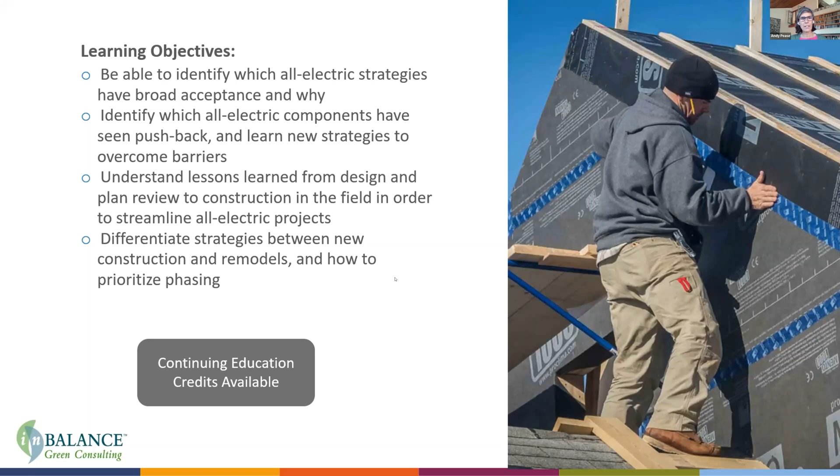which has been up and running as an all electric building for quite a few years now. So as all electric buildings come online, we're taking notes. Where have been the challenges and successes, so hopefully we can keep going forward with more and more success. The overview: why all electric in the first place, appliances starting with cooktops because that's huge, heat pumps, electricity panels, and then some resources for incentives. As Michelle noted, we're really hoping to have some Q&A. What are your experiences? What are your questions?

So jumping in with the overview, we've been having a theme of higher performance buildings. If you've been participating in this series, thank you. They build on each other to a certain extent, but we're basically trying to lift the bar in as least painless ways as we can, because we know that the higher performance buildings of today have lower energy bills. There's not the moisture problems and the indoor air quality problems that come with that. There's comfort that's more consistent, technologies are up to date, it's current, healthy, resilient, and increasingly all electric.

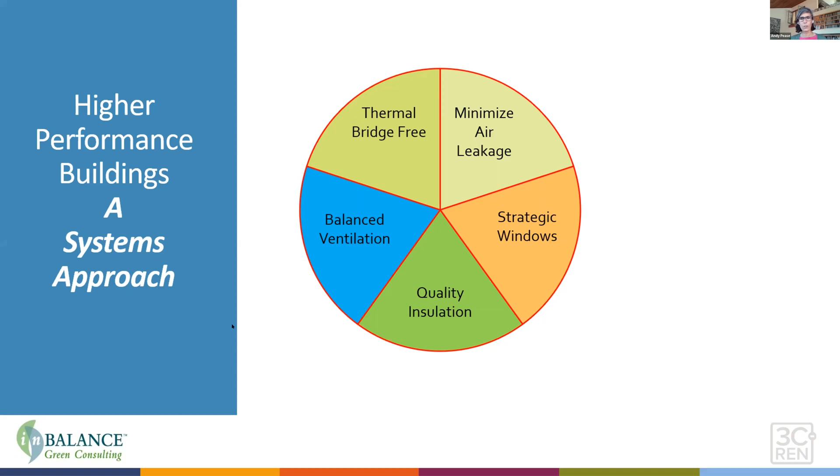Our windows are really excellent. We have good insulation and balanced ventilation, so that we have it healthy. And then we add in the all-electric component, so it's got renewable energy, so that'll be cost effective. It's safe because you're not ending up with any of the toxins from burning fossil fuels. And of course, that's helping for climate action and zero carbon.

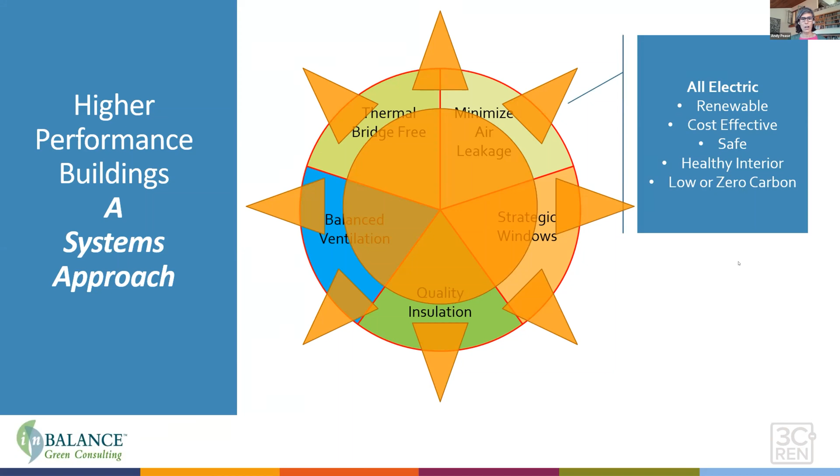But implementation, as we know, can be tricky. The general issues we've encountered are that folks often have outdated information. Builders are reluctant to jump into electric, so we might have a homeowner or an architect on board, but not the builder, or the other way around. Some combination. The costs are not always what we think they ought to be - we say it's going to be one cost and it's a different experience when we get together in making it happen. And then there's just technical nuance, like, okay, how do we actually make this happen?

Our response in general is that we do need to acknowledge there are some real challenges during this transition. So we're going to talk about sharing the fixes and the options and addressing gaps in the education, training, and supply - who's able to do this work - and keep evolving and responding as we go.

So let's talk about the specifics. We're going to jump in with appliances. The issue we really see here is consumer reluctance. We start with this because sometimes this one item ends up being the reluctance for the entire going all electric. A lot of folks have these old ideas about electric cooking - they still think of that resistance model rather than induction cooktops.

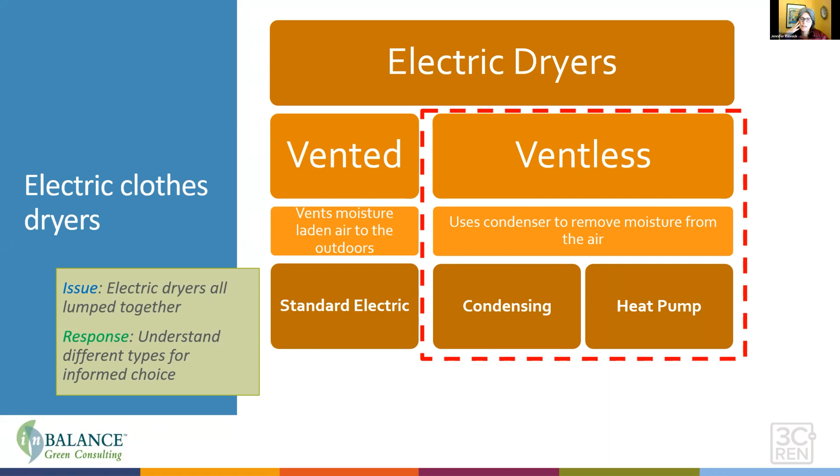But the reason we especially like the ventless style is because literally we don't have to put a big hole in the wall to vent the super hot, moist air to the outdoors. So the overall advantage for passive house energy efficiency is that there's no vent. We use the word ventless because that is how you will find it when you do your searches online. I've tried a million times - condensing, heat pump, not so much comes up - but if I just go straight to ventless, then it opens the door to both the heat pump and condensing.

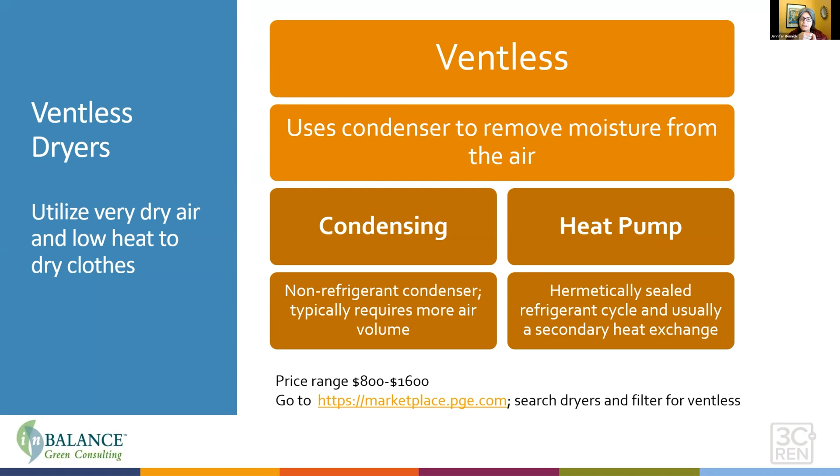Technically, both have condenser coils in them. The difference between the condensing and the heat pump dryer is that the heat pump dryer has a refrigerant cycle in it, and it's hermetically sealed, exactly like what you have in your refrigerator already. And they use that very, very cold refrigerant to condense the moisture out of the air, creating very dry air and low heat that's used to dry the clothes. The condensing dryer does the same thing, it just doesn't use refrigerant for that process.

This is how Bosch describes it. I picked this one because it's got a great diagram of their condensing dryer as opposed to their heat pump dryer. Basically, air from around your house, or wherever it's installed, is pulled in through the unit. That air circulates past the condensing coils and is combined with warm air from the drum itself. So you're drying out the warm air from the drum and the air you've pulled in from around the house. That air gets dried out, then it's reheated on low heat and put back into the drum. So it's continually moving through that cycle.

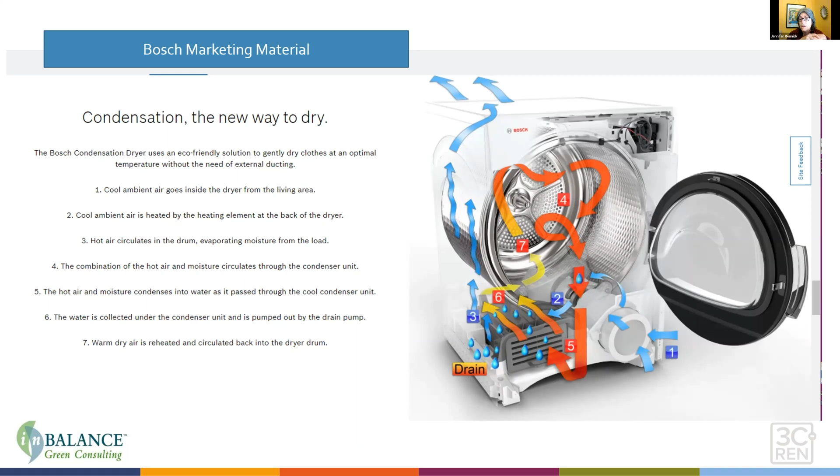So what that means is that these types of dryers have to have a place for that condensate, for that water to go. Depending on the dryer model, it'll either already have a situation where it's drained out through a hose, which is smaller than what you have for your washing machine but very similar. Some of the units, if they're stackable, will even have the hose feed into the washer that then feeds out to the drain, or the water's going to go to a reservoir. A lot of them will have a reservoir at the upper left-hand side of the unit, and you can pull it out and dump the water out. I recommend the hose.

The other thing they all have is a condenser coil. Some of the units, you have to remember to go to the bottom of your dryer unit and pull out the condensing coil and clean it off manually at least once a month to get lint and dust off of it.

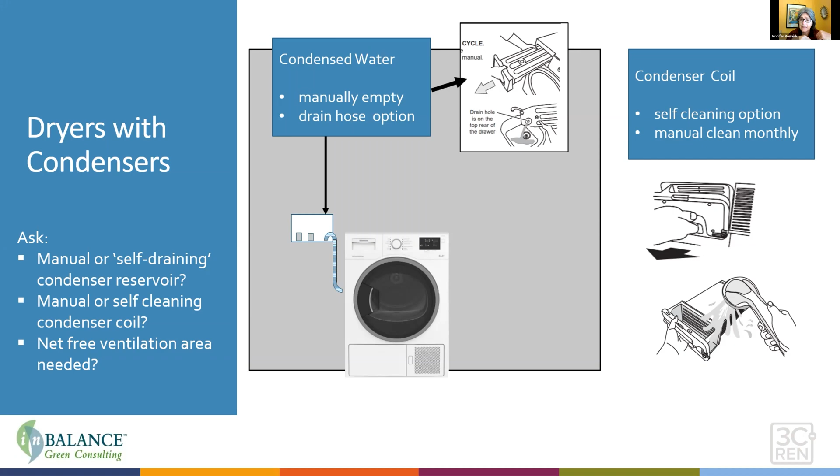And if it stays clean, it's going to work really well. Again, you might consider going with a unit that has a self-cleaning condenser coil.

Now here's a story from the field. This is my nephew's apartment. My nephew and my sister know about all this technology, they hear me talk about it all the time, so they were pretty sure. They told me, we got the heat pump dryer, and I was like, great. And their clothes weren't drying. They were really bummed. So I said, what model number do you have? Which one did you actually get?

So their apartment was designed for the one that's called, quote unquote, heat pump. It only needs a little bit of ventilation around it, just a door cut low at the top and cut low or up a bit at the bottom, and you'll get enough air. But actually the builder ended up installing the Bosch condensing version, which requires louver doors. It requires more air because it's not quite as efficient. So for a $300 upgrade, what they thought they were getting is the actual heat pump style, they ended up with the condenser type.

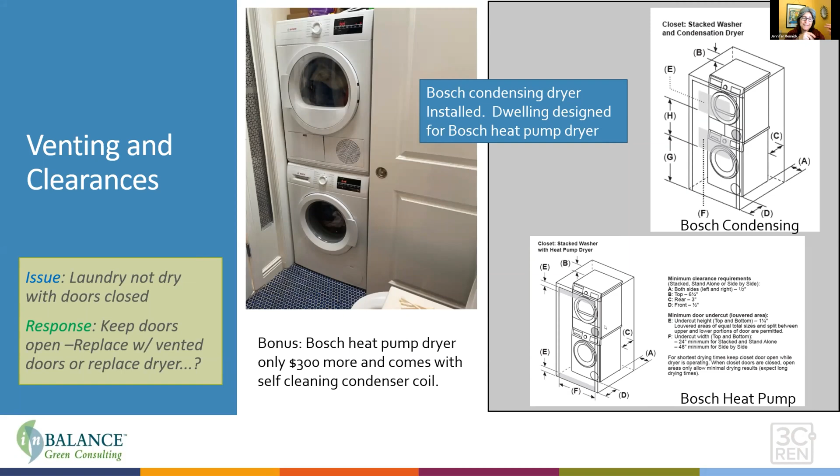Both are self-drain. So the solution in this case is to just leave the doors open. What they had planned, you could get louver doors, or they could call the installer out and say, no, we really wanted the other ones, we want them. So that's why it's good to know about those things.

So as we look at our appliances overall, we're trying to make judgments based on the overall energy use, but also the peak energy load. If we think about the efficiency of our appliances, an old refrigerator might use 1,700 kilowatt hours in a year, and a newer one might be 450 kilowatt hours in a year, which is great, unless you take the old one and put it in the garage. Don't do that if you can possibly help it.

Each of these are going to have units, and you can see a washing machine is actually a relatively low energy use. A good one is going to have a lot of spin to it, so that makes it easier to dry. The dryer can be a significant energy user. An efficient electric dryer might still be lower than an old electric dryer, but you could get down to 150 kilowatt hours per year with one of those heat pump type units.

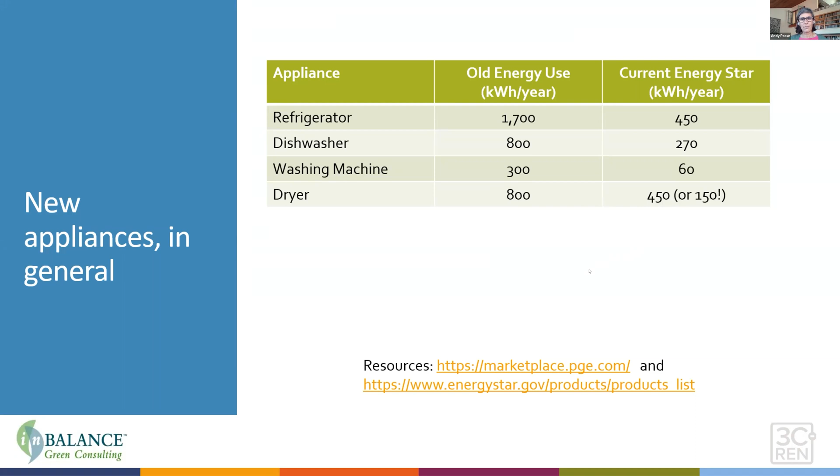And in a remodel, as we talk about new appliances using less energy, that might also ease some space on your electrical panel, and we'll talk about that more in a little bit.

Andy, all right, let's jump. Yeah, go ahead, move on.

There is a question, I think it'd be a quick answer for folks, and I was wondering too. From Tom: how does drying time of a ventless dryer compare to the drying time of a gas dryer? Any thoughts? Okay, yeah, that's a good question.

It's going to be twice as long, that's my rule of thumb that I tell people, twice as long. I'm in the process of swapping this out in my own place. My gas dryer, I could dry my clothes in like 20 minutes, but of course they're baked and the fabrics are ruined.

My sister is also a textile design person, she tells me all the time, you're ruining your clothes. So she is very happy to get the condensing dryer, low heat, saves the fabrics, but you might be in there for an hour if you're used to it being 20 to 30 minutes in your gas dryer, if you were drying on high heat. But you can't do high heat on the other units, you just can't.

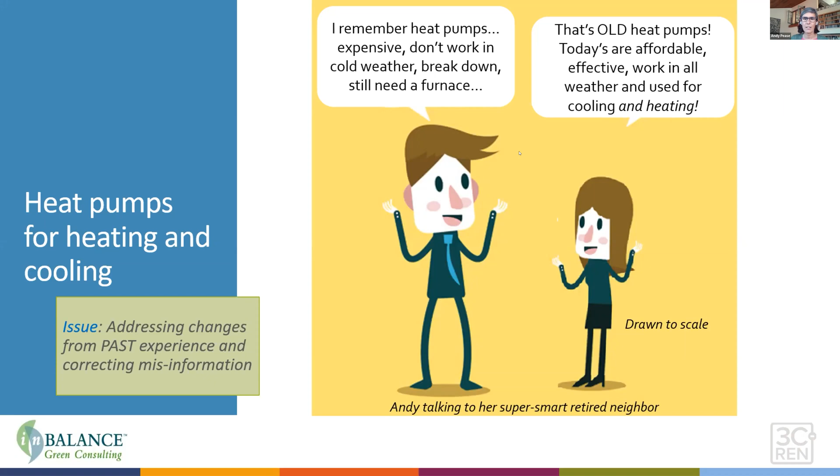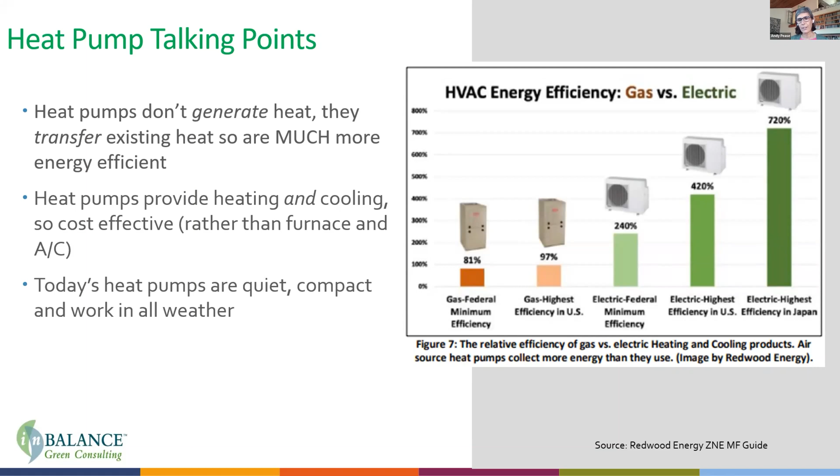Heat pumps provide heating and cooling, so they're cost effective. It's going to be more expensive than just a standalone furnace, but if you're doing air conditioning, you use the same unit to do both. In new construction, everybody's using heat pumps. And they're quiet, they're compact, they work in all weather. There used to be just one fan speed, now they're variable. So there's a lot of great things going on with heat pumps.

I won't spend a lot of time on this. We have a whole 3C Ren seminar on heat pumps and how to install them, but I just want to lay out the parts and pieces to demystify it. This is Jennifer's house, this is Jennifer's dog, Sparky.

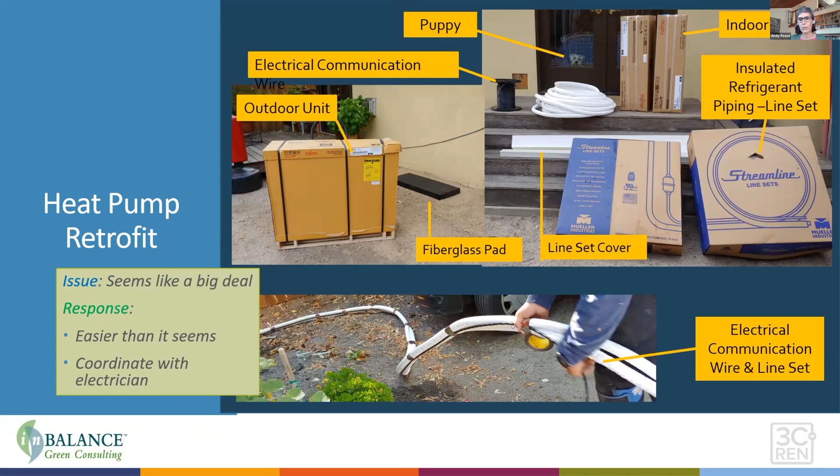And these are just kind of a kit of parts that come in. There's an outdoor unit, there's lines, there's boxes. This particular line is the electrical communication and wires all together in it. And you need to coordinate with an electrician. That's definitely a lesson learned - making sure that the installer, who may be an HVAC contractor and not an electrician, has that coordinated.

There's a pad that's on the ground, you can mount this thing outside, and figure out where the line is going to go. And then on the inside, it's just a pretty straightforward wall unit. You mount the bracket, there's the contents inside - it's a wall unit.

Jennifer, I think you were trying to figure out where to put the unit in your own house, using an outside wall? Yes, so I had an idea of where I thought the unit should go, and then they came out and took a look at it, and reminded me that on the back side of each of these wall units, indoor units, all of them do have condensate - a heat pump condensates just like your refrigerator. It's in a little tray usually, but it usually evaporates. These make more condensation than your refrigerator, but putting them on an outside wall was ideal.

So we said, okay, we changed the location on that. That was a snap. And then 3 hours later, they were done - completely functional, finished, done in 3 hours. So I have 3 heads on the inside, the outdoor unit on the outside.

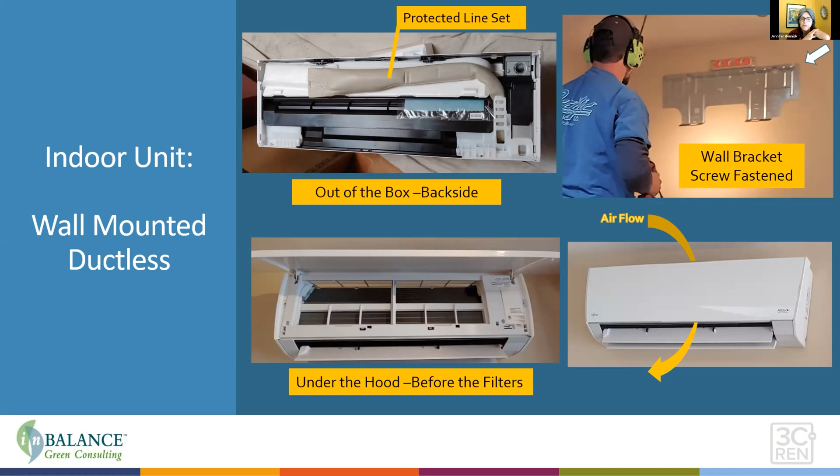And then just one unit is doing a little bit of adjusting on the thermal adjustments. Each indoor unit has its own thermostat, so my kids could control their two thermostats all they want, which is part of the reason I made sure they each had one in their room. And then the remainder of the house just has the one head with the one thermostat. My room opens up right onto our living room, and it heats it all, and it's fine. It's perfectly comfortable.

Another issue that comes up in terms of heat pumps is basically where to put the stuff on the residential side. You just saw it's fairly straightforward - you just put the one unit down on the ground and multiple heads inside.

In multifamily housing, this is Deborah Woodle from 196 Architects who had attended one of our earlier webinars. She was trying to go with a heat pump, but realized that the unit itself would need an access door, and she was designing for this multifamily housing. So in that entryway, you can often do a little drop soffit there. She found this pretty trick little BAUCO access door that folds, and it's sheetrock, so the unit just stays up in there.

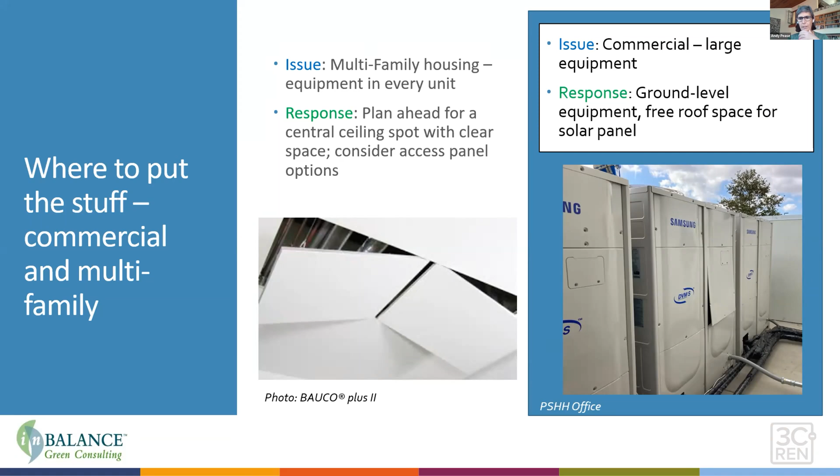In a commercial setting, this is People's Self-Help Housing office building. They made a little courtyard, just like a little enclosed space to ground mount these very large units.

And then heat pump water heaters - Michelle has her own story from the field as she was trying to go all electric with her water heater. I had about a 10-year-old tankless gas water heater, which was dying, obviously. Lucky for us, right after we put solar panels on the roof, it did die. So my thought of eventually replacing and using a heat pump water heater became a reality, and it needed to happen fast. The first thing to know is that it's still hard to make this happen fast, and that's in everybody's mind - oh, we have no hot water, we got to just get something in there. So it's best done on new construction or as a measured retrofit measure.

I knew what I wanted thanks to working with Jen and Andy and Mike so much, and I had picked out the equipment, but finding somebody to install it was another matter. Like a good homeowner, I said I'm going to get multiple bids - I definitely recommend getting your 3 bids. It was enlightening. Finding a contractor confident enough to bid it properly was time consuming. I probably talked to 4 or 5 plumbers, and the bids ranged anywhere from $1,250 to install and tie into existing plumbing up to $6,000, not including equipment. It's a little disorienting at first, like how could it be $6,000, right? But with some time, you'll find somebody confident enough to know that it's basically like installing any water heater.

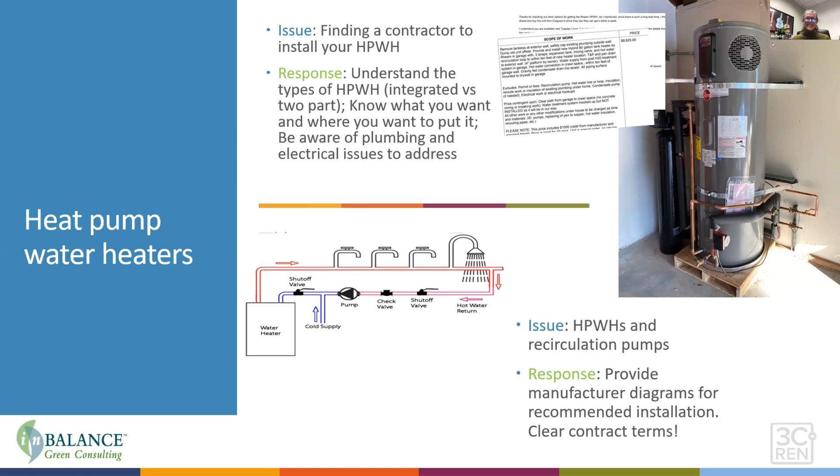So a couple of quick lessons on heat pump water heaters. Thanks, Michelle. It was kind of an all-office project to be like, well, did you know, what about this, and try that?

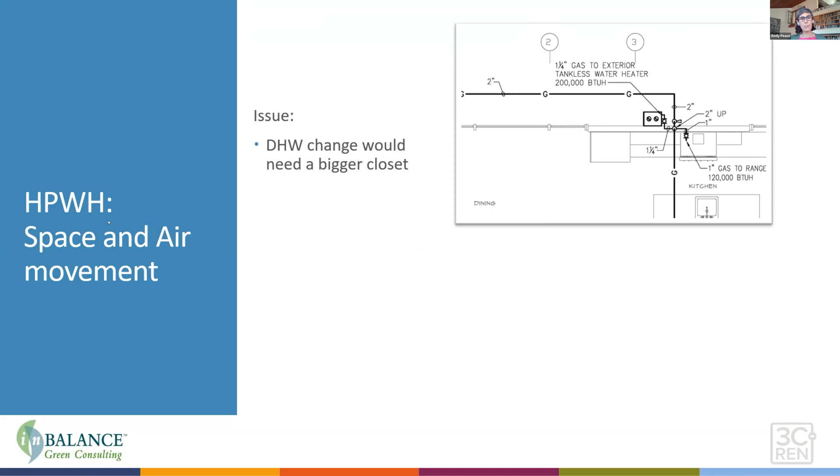Another thing about heat pump water heaters is that they need some physical space for air movement. The tank isn't that big, and you can certainly put it in a garage type of setting, but it does need some air. This is a project where the owner was doing an ADU on the back of their property, drawing in a gas line, and their initial plan was to use a gas tankless water heater.

Then they realized they'd be able to drop gas, since everything else was electric and they were comfortable with that. But because it was an ADU, it didn't have a garage adjacent, and they didn't have the space inside. So they built a little unit, a closet, kind of a shed outside with a louvered door, protected from the elements. In this case, they didn't have to insulate it, though some locations would make more sense to insulate. Basically, they were able to make that substitution, drop the gas line, and save 150 feet of gas line to this unit.

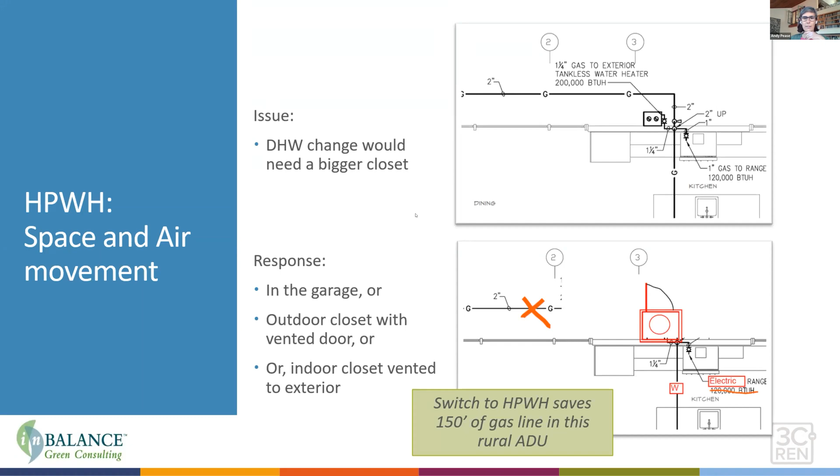So you can do an indoor closet if it's vented to the exterior so you can get air that way, or you can do an outdoor closet, or of course in the garage to give enough space. This is a model installation for people's self-help housing.

Drawn to scale here, you can see the unit itself is just about 6 feet tall. There's a dedicated electrical circuit over here. On this one, you can see the condensate floor drain with the condensate drain and the relief valve, and then the pressure mixing valve, and an expansion tank over here. You can see that all of the pipes are insulated.

When Jennifer saw that, she said, oh my God, get pictures. It's like a model installation because you can see all the parts and pieces. So that's a really good commercial installation. It's actually beautiful.

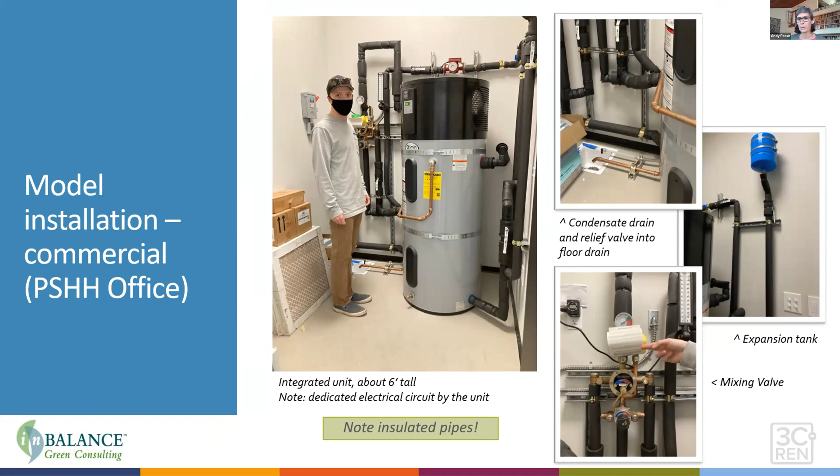It's an interesting story in the sense that this is people self-helping for their residential units doing affordable housing, trying to go all electric. They were the builder for their own new office building, 30,000 square feet, and had to do the same considerations but in commercial terms for heat pumps for heating and air conditioning. That was easy, but the switch to a heat pump water heater was new to them at this scale, so they really did their research and did it right.

All right, so electricity. This is our chance to talk about panels and what goes on with that. Jennifer, you want to jump in here?

We added this section because, like Andy said, we have a whole presentation on heat pump space heating, the ins and outs, all the different types and ways to mount them. And we do a whole other session on heat pump water heaters, because those also come as the integrated type you just saw, and split systems, meaning indoor tank, outdoor heat pump unit. One question that comes up a lot is, that all sounds great, but what happens if you don't think your panel's large enough? Or what if you have to upgrade to a larger panel? Or what should you consider getting wired in now when you have the electrician out for one project?

Maybe since it's hard to get folks out to your house these days, get them out to wire it up for all the things you might need.

So this is a list of the items that would more than likely, or could possibly affect your circuitry, wiring, or panel size. So if you have a gas dryer now, which is my situation, I'd need an electrician to come out for the electric heat pump dryer I want. Here's my recommendation - this can work for your clients if you're working on remodels or additions. Some of this is code for new construction, but the idea is that you pre-wire for those appliances.

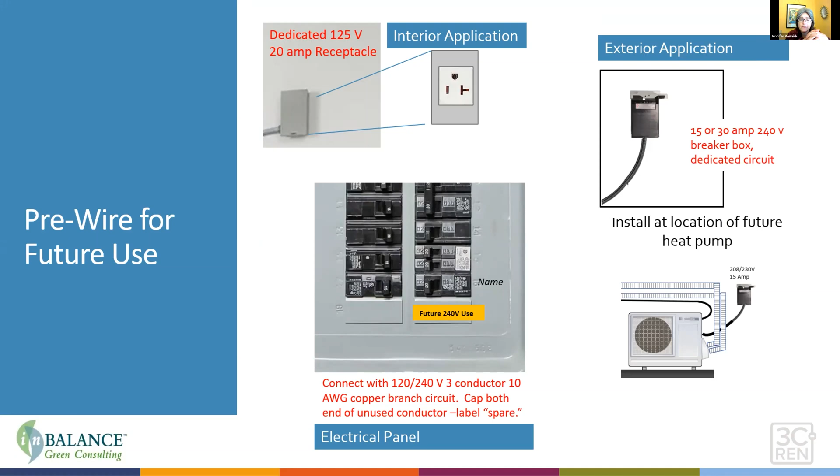Now it turns out my house only has a 100 amp panel. The new code is 200 amp - the new code coming out in 2022 is going to be 225 amp panel required. So I wanted to know, am I going to be able to add this stuff, and at what point am I going to have to upgrade my panel? When am I going to run out of room?

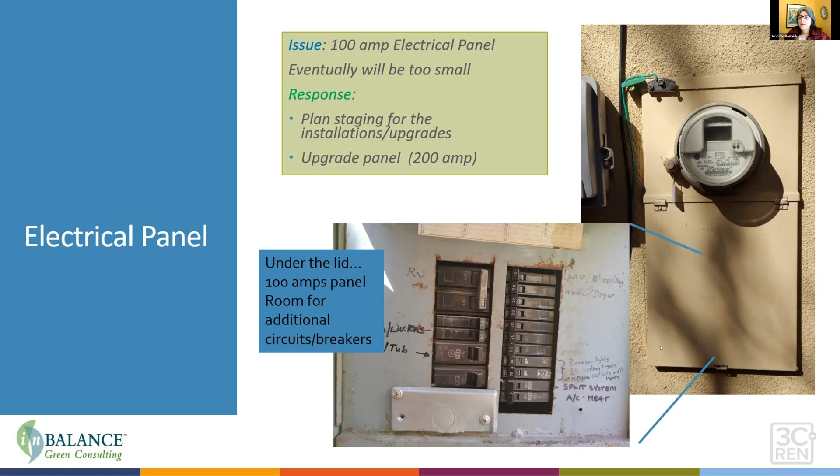So there's a rule of thumb you guys can use - you can also look this up, I Googled this on the internet, not these exact steps, but I mean I Googled to see what you would find. There are a number of folks who offer up guiding people through step 1, step 2, step 3, etcetera, so you can determine if your electric panel is going to be large enough to add things. They're usually doing this because folks want EV charging - that's been the main impetus. I did this because I want an induction unit, and I want to know if my induction cooking is going to force me to get a new panel before I'm ready to upgrade for some of the other stuff on my all-electric project.

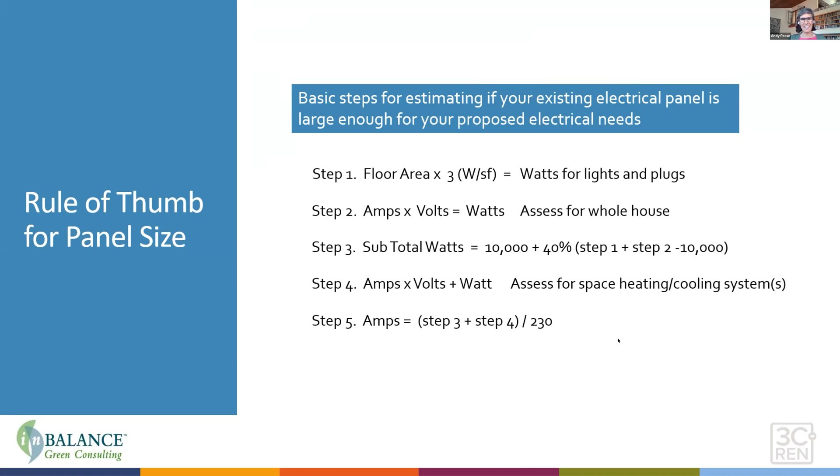So being a number person that I am, I made a little spreadsheet with those steps and formulas in there. The first step is you look at your square footage - my house is small, it's a 1,200 square foot house - and you multiply that times 3 watts per square foot, just an average, to give you an idea of how many watts of demand you're going to have from your lighting and your plugs. Then the rule of thumb is for a really small kitchen, you'd have at least a 20 amp circuit, bigger kitchen more. I threw my microwave in there, my fridge, dishwasher, washer.

I do have a place where I can plug in my family's RV when they visit. I use a car trickle charger right now. And then there's a formula that you follow - then you throw in your mini splits. Bottom line was, when I did all that, after my mini splits, I only needed 79 amp.

I have a 100 amp panel. It's like, okay, no brainer, that part worked. Now when I go to add the induction, even though I got a little bit of credit on my upgraded dishwasher, upgraded fridge, my upgraded washer, that doesn't really override how much oomph you need for those induction units. And this is a slide-in unit I'm getting. So when I did that, it's like, yeah, I'm really close to the 100 amp panel. So I'm going to go for it anyway.

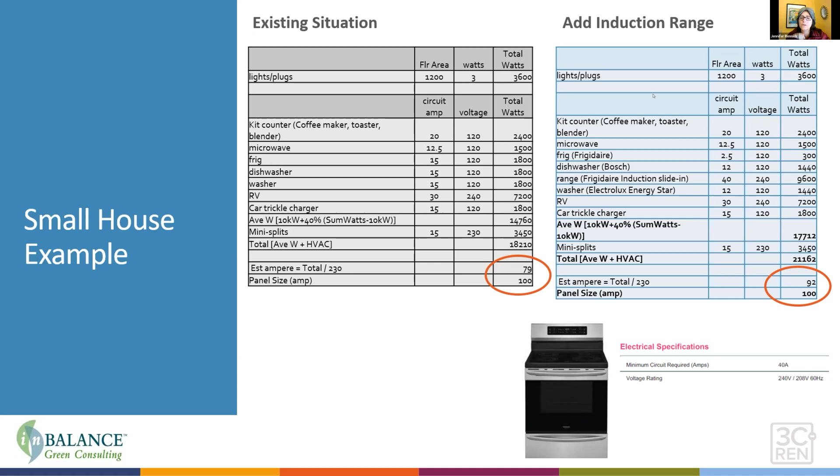Because I'll be able to finish doing the work and get my permit. But my very next part of the project, as soon as I add one more thing on my all electric upgrade, which is going to be the heat pump water heater and the EV charging, then I'm well over that. I'm closer to 130 amps, but I'll probably upgrade to the 200 amp anyway and get solar.

Great. Yeah, speaking of solar, so let's jump in here. I know we want to make sure that we have enough time for Q&A.

With renewable energy, we're basically seeing two main issues that are coming up: either not enough space for the solar panels, or the upfront costs become barriers. So starting with the not enough space, as we think about that planning ahead exercise that Jennifer went through in terms of knowing all of your loads, baseline per code, all electric is going to be more, and then your car or cars.

You can always start smaller as long as you plan for all the future units. So if you're not quite sure how much electricity you're going to be using, you can always add on later as you need to. That's what we did at our house. We had 12 panels put on over 10 years ago. Then a couple of years ago, because we had a plug-in car, we added another 6 panels on a different orientation.

The location is one of the first things we always talk to architects about for new construction, is to simplify the roof forms. A whole bunch of textural changes might look nice for the ARC, but it really does make it problematic to be able to have clusters of solar panels.

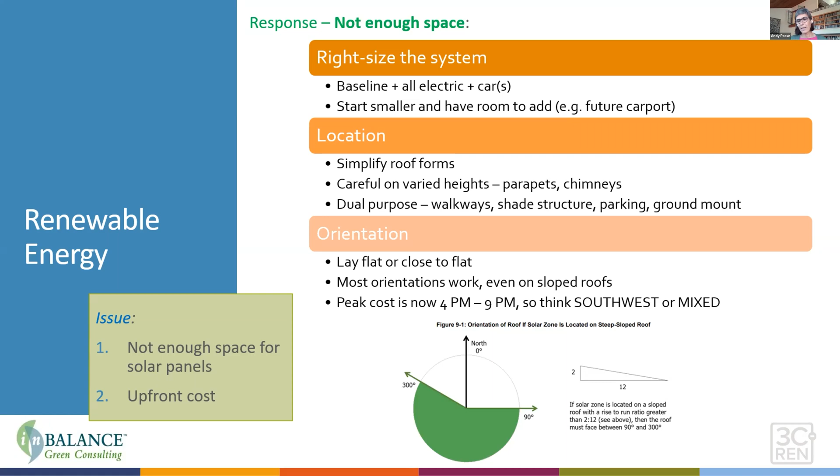And with the peak cost for electricity now between 4 p.m. and 9 p.m. -- it used to be like 1 p.m. to 5 p.m., so now it's shifted later -- southwest or a mix of orientations is really the way that you want to go with that.

Here's another example, part 2 of that people's self-help housing, where they put the equipment on the ground to leave the entire roof for solar panels. They're offsetting, I think it was designed about 70% offset. It's still being commissioned, so I don't have the current numbers. But they were able to not have any parapet, so all they had to leave at the edge was just enough for the walkway. They banked the inverters against a little low wall, but that was it for kind of disruptive roof construction.

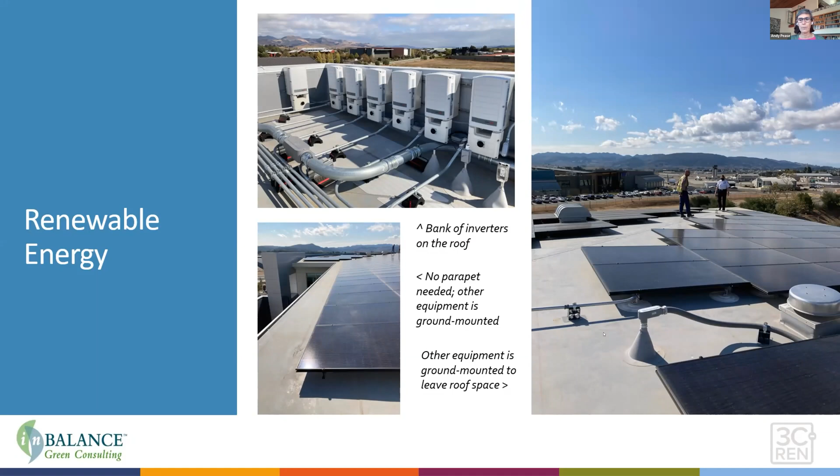And then part 2 of the renewable energy is that upfront cost, and this is a bit of a conversation, right? In terms of renewable, solar panels are not a construction cost. It's a power purchase decision, and we need to reframe solar panels as thinking of them like just a monthly utility bill.

So we're thinking about, you got to pay for electricity every month. You're either going to be paying for it by financing your solar panels, or you're paying it to PG&E. So think about it in those ways to be able to talk about and get the right size of the system. And with loans, often even on day one, you're going to be cash positive in terms of your loan payment compared to what your electric bills used to be.

And then you can consider leasing. There's not an upfront cost, they're convenient -- it's for a price, right? It's not quite as efficient as if you do a mortgage yourself, but it's a tool for those who want to be able to make that happen.

There's some pretty creative approaches coming online. For nonprofits, like a church, there's a company that'll come in and sell the tax credits so it still becomes affordable. I just heard about a company here in San Luis doing multi-tenant commercial spaces. It's a big problem, like who's going to pay for the solar panels versus who gets the benefit.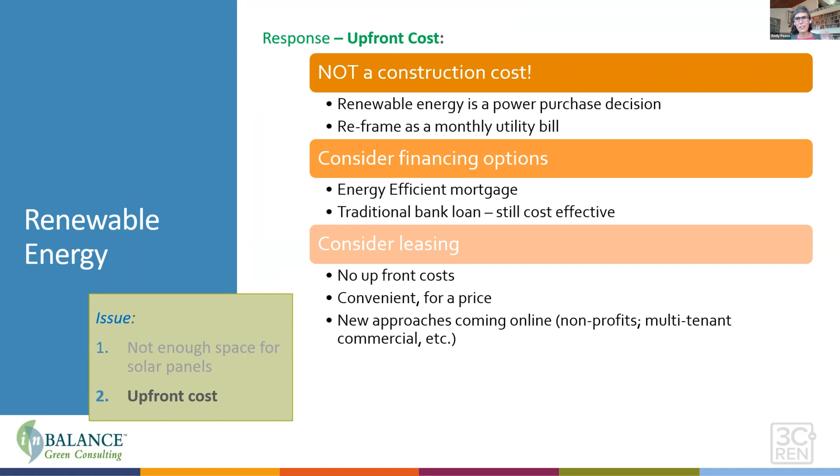We're trying different options to get those kinds of results. And then the batteries, again, it's just making enough space for them. You need about 10 feet of length and 8 feet high. Group them together as much as you can, and try not to have one out of sight of the other if you can help it. It's okay to wrap it on an inside corner.

Just to recognize that batteries don't pay for themselves right now still, but there is a value in that intangible for the resiliency piece. So we're seeing more and more folks installing them and looking at their critical loads - the refrigerators, key lighting, and some outlets. So a relatively small battery can really make a difference.

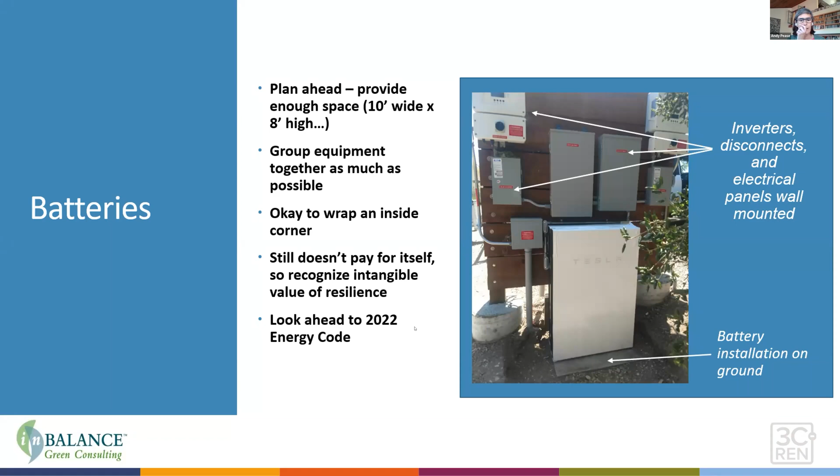And then, of course, we're looking forward to the technology of your car battery being part of your resilience. I was just seeing a program where they're using electric school buses as little portable batteries for a crisis, because they're mobile, right? You don't need them very often, and then you can just wheel them over to whoever needs it. So some pretty neat things happening. And in the new code cycle, we're going to continue to see increased value for those batteries.

All right, to wrap up, we're going to share a couple of resources here. One is the Tech Clean California program, it's for contractors. Jennifer, this is a contractor-based system, right, through a state program?

Specifically this part covers heat pump water heaters. This is one of the solutions coming on board to help build the market. Unfortunately, Michelle's experience is not the only one, where an individual homeowner knows they want the heat pump water heater, and now it's tricky to get the plumber to come out and do it. In new construction, we haven't had any trouble at all, because we've got general contractors on board with plumbers who can install everything, but that individual homeowner is having a hard time.

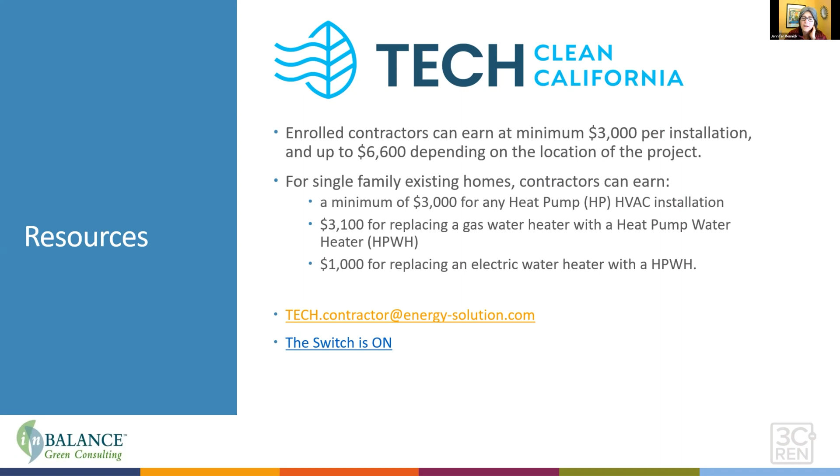So now, if you could get your plumber to enroll in the tech program, they can qualify for incentives. There's a $6,600 incentive - I looked up almost every zip code in our Tri-County region, and I didn't see any that weren't part of the higher dollar incentive. So, as architects, what I did is I printed out the forms from tech. I'm going to hand it to the plumber who's coming out to the house and find out if we can get him installed and enrolled.

But the really interesting thing about this is there's an EV readiness piece - they'll actually help cover the cost of the electrical upgrade in order to get the EV charger. There's a new construction electrification program, but at this time it's really just for new affordable housing. There's new programs in the works, so keep an eye on that.

Just as a quick case study, I talked to a friend this morning who was on his way to pick up his new electric vehicle. On the vehicle itself, he's getting a $2,000 rebate.